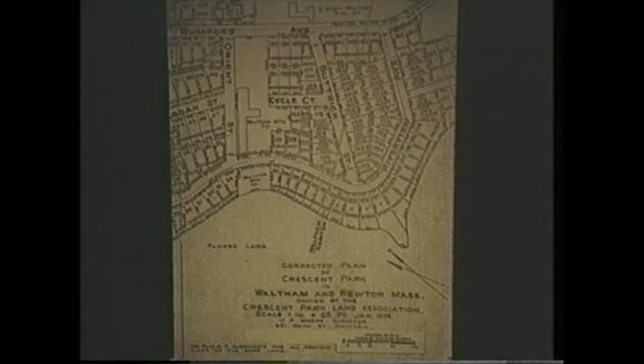He put his plant up on Rumford Avenue, as I mentioned, makers of Orient bicycles, and bought a lot of land along with the building, naming two streets after his business: Orient Street, for his bicycles, and Cycle Court. Cycle Court is still there today as a small parking lot off Buttrick Street, but Orient Street was absorbed as the Waltham Manufacturing Company expanded over the years.

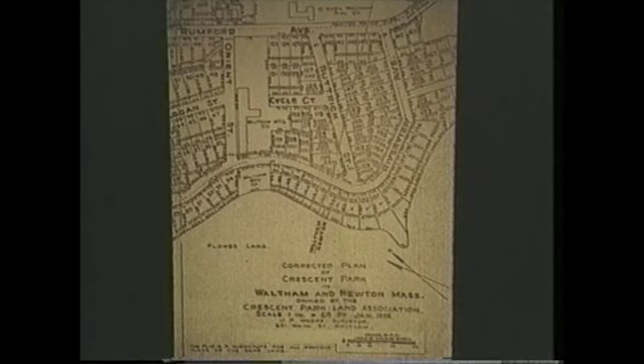Here's the fork in the front of the Orient bicycle. It was one of the 22 design patents that Charles Herman Metz had on bicycles. His most popular one was the left-handed, right-handed thread, still used on bicycles today for the pedals. The porcelain plate says Orient, Mile-a-Minute bicycle, and the engraving around it says Waltham Manufacturing Company, Waltham, Mass.

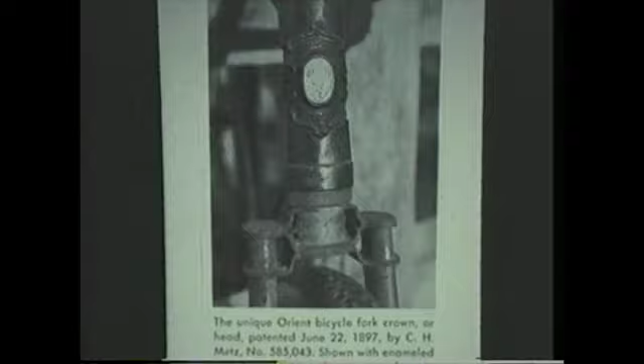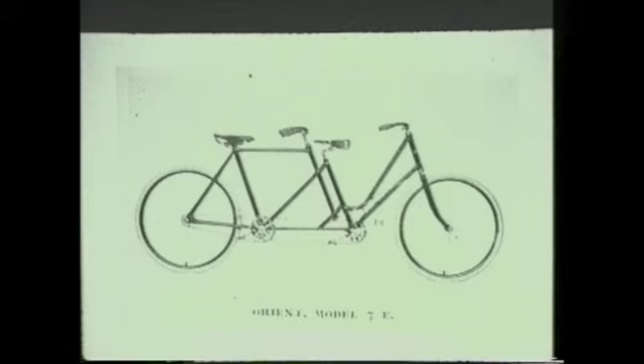Here's a bicycle built for two, obviously a man and a woman's bike. He made them for three and four. And he made them for four, five. There's a five and a six and a seven.

And he even made one for ten, a bicycle built for ten. You see right here, he called it the Oriten. He took the word Orient and changed the last three letters as a play on words, the Oriten.

It was a very popular bicycle, used in all the fairs, races, and other events. Of course, it was the largest bicycle in the world, and it held the record as the largest bicycle until 1966. The bicycle weighed 350 pounds, and with 10 men on board, they would carry a total of 2,000 pounds, or one ton, on two wheels.

It was quite an engineering feat. The bicycle is now located in the Ford Museum in Dearborn, Michigan. He made this around 1898, when the company was really doing good.

In 1894 they made 1,500 bicycles. In 1895 he went up to 7,000 bicycles a year. In 1896 he went up to 50,000. In 1897, 100,000 bicycles were built by the Waltham Manufacturing Company. They were doing real well.

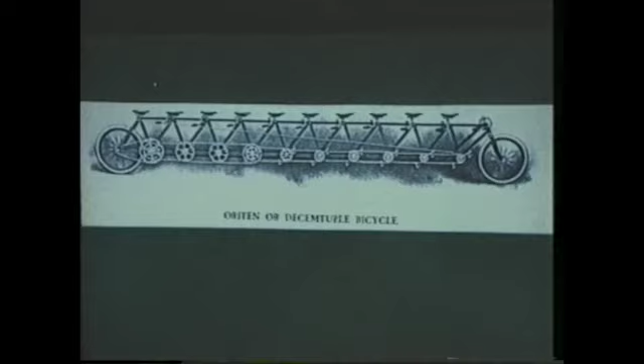This is what the bicycle, the 10-seater, looks like without anyone on it. And if you go to the Ford Museum in Michigan, this is what it looks like. Still another view of the 10-seater bike, the Oriten.

Now, one time they had 10 girls take the bicycle on a tour of Europe as part of a show business act, and they rode it around for the kings and queens of Europe. The only thing wrong with the bicycle, according to some of the men I talked to, is we had trolley tracks in Waltham, and when the wheels got caught in the trolley tracks, the 10 men would tumble onto the road.

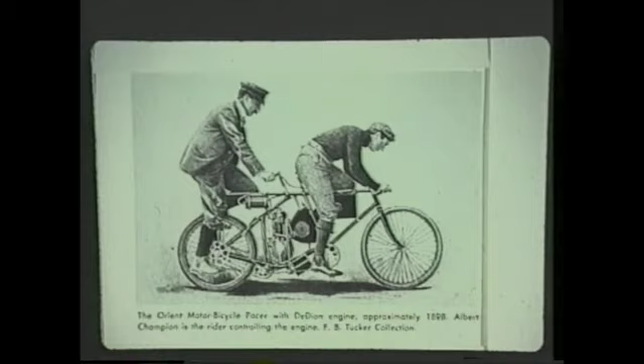Now, these multi-seated bicycles first had a practical use. They were used as pacers during the race. The race was the big thing, to make those single-seated bikes go as fast as possible, and the multi-seaters would break the wind. These pacers would go ahead of the single-seated bikes, breaking the wind so the single-seaters could go faster.

But along around 1898, Charles Metz decided to put a motor on a bicycle to act as a pacer, and he called it the Orient Motor Bicycle Pacer. The pacer itself became an instrument for conducting races, and they started to race motor bicycles, which in effect was a motorcycle. He is one of several people in the United States to claim to have invented the motorcycle.

Now, as these races got more and more acceptable to people throughout the United States and more competitive, he went over to France and hired a great French racer named Albert Champion, as you see here in the picture, the man on the left. Albert Champion raced his bicycles, motorcycles, and three-wheel motorized vehicles.

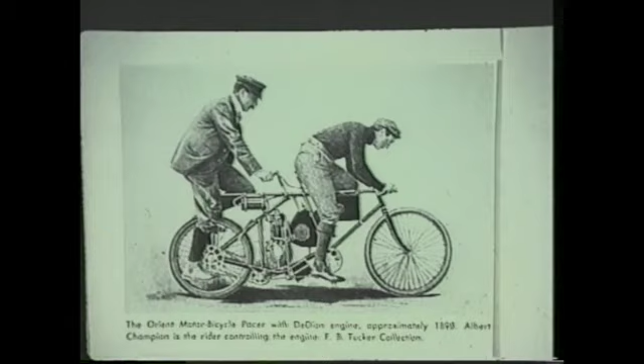He worked for the Waltham Manufacturing Company, traveling around the country racing in the name of the Waltham Manufacturing Company and the Orient bicycles. Later on in life, Albert Champion would go on to invent the Champion spark plug, which we all can see today on the shelves in automotive stores. The Champion spark plugs, invented by Albert Champion, one-time racer for the Waltham Manufacturing Company.

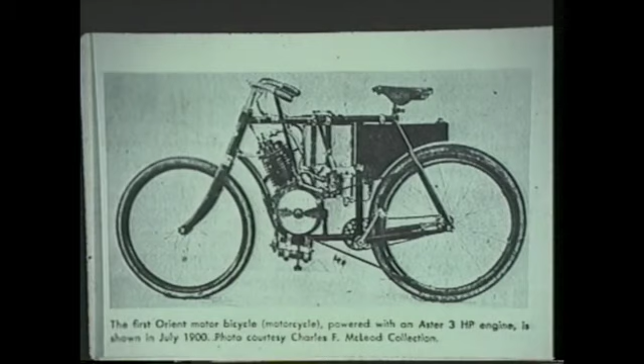Now they're starting to put these motor bicycles into production along with their bicycles. Here's one of the first Orient motor bicycles with an Aster 3 horsepower engine, July 1900. Here's a photograph of pretty much the same bicycle. You might notice the word Orient on the crankcase of the engine.

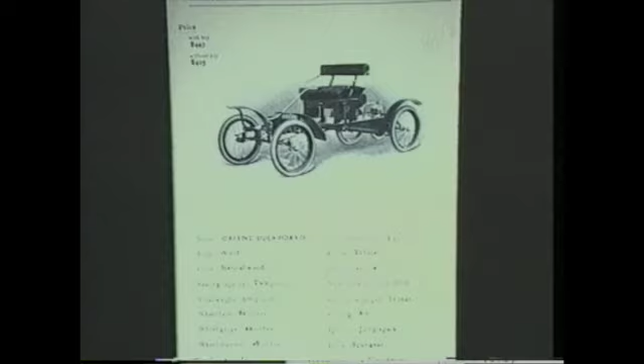Meanwhile, back in Waltham, John Robbins is still there as the superintendent, and they have a new president, Leonard Gaylord. But they come out with a second motorized vehicle called the Orient Buckboard. It was a horse-drawn vehicle, a buckboard, and they attached the famous Orient name in front of it. They, in effect, had another horseless carriage.

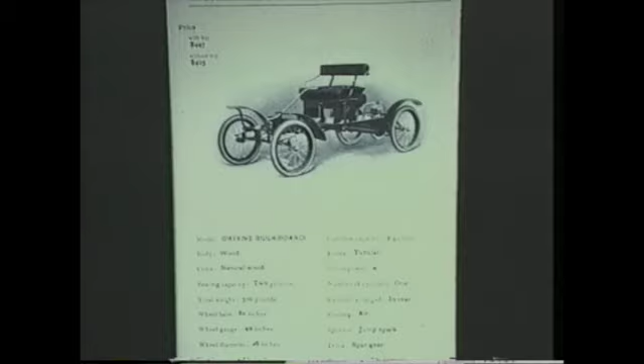The engine, the 4 horsepower engine, is located between the rear wheels. It was a very fine and successful vehicle. However, it didn't have reverse, and for the operator to turn it around, he would have to get out of the car, pick up the front, and swing it around. One of these Orient buckboards, 1903, is on display in the Waltham Museum.

Now they were producing 2 cars. The old Orient Runabout, which we talked about earlier, is called the Orient Motor Car, selling for $950, and the Orient Buckboard is the second vehicle, selling for $500. This is 1903, along with their motorcycles and bicycles.

But right along this time, they're starting to drop their line of bicycles and concentrate on automobiles. And they'll be dropping their motorcycles also along 1903, 1904.

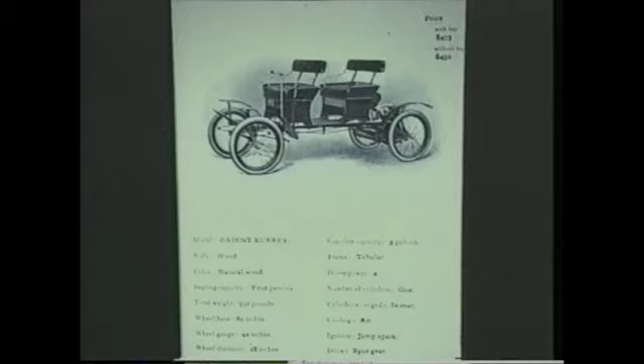And they were concentrating on automobiles such as this, the Orient Surrey, the 4-wheel vehicle, similar to the Surrey used in horse-drawn carriages. Sold for $450 without the top and $475 with the top.

They made the touring car, the touring runabout. Now here they're trying to get more horsepower. As you notice, there's 16 horsepower there. They've combined the 4 horsepower single-cylinder engine with 3 others to make a 4-cylinder 16 horsepower.

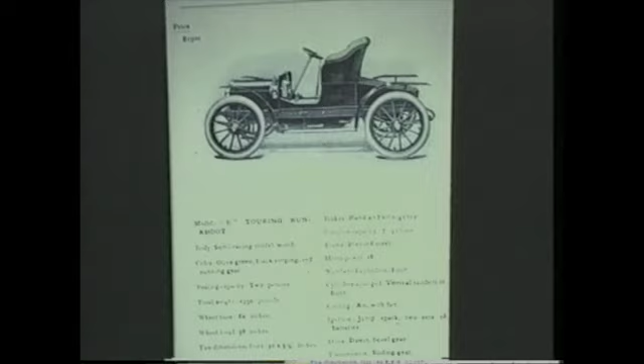This is going to prove to be a mistake because they're still relying on air cooling for these larger horsepower engines, where they should be going to water-cooled engines. It was all right for 1 or 2 cylinders, but not for the multi-cylinders that they would put on these other cars, such as the Orient Limousine.

Likewise with the Orient Light Touring Car and the Deluxe Touring Car, made in Waltham around 1906 and 7. Sold for $2,250.

This particular one you can see down at Heritage Plantation Museum in Sandwich, Mass. It's really exactly like the 1903 one, except they added a running board and a hood-covered box in the front to make it look like there was an engine there. Actually, that red box is just an empty compartment to put luggage in. So if you're down at the Heritage Plantation Museum, you'll see the last of their Orient buckboards.

They sold about 500 of these each year for the past 5 years, and it was the only vehicle that was making money for the Waltham Manufacturing Company. All the others were losing money, mainly because they were air-cooled.

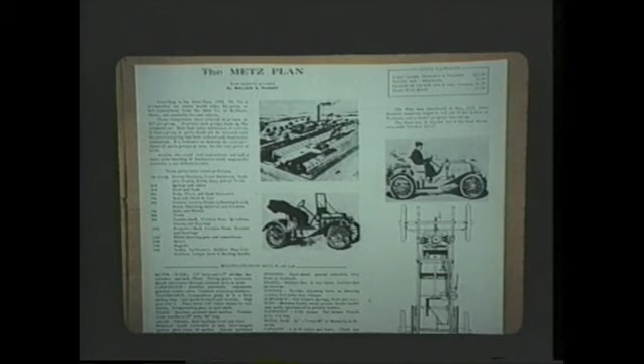This is the 1909 two-cylinder, 10 horsepower Metz plan car, as appearing in their first sales literature. This is what their plan car looked like.

To those mechanics out there, this is what the chassis looked like. A two-cylinder air-cooled engine which drove a friction drive transmission to two chain-driven wheels for power to the car at that time. A friction drive was an unusual method of transportation. Most cars at that time had standard gears. Only the Carter car, the Sears Roebuck car, and the Metz car had a friction drive. We'll be talking more about the friction drive Metz cars as we go along.

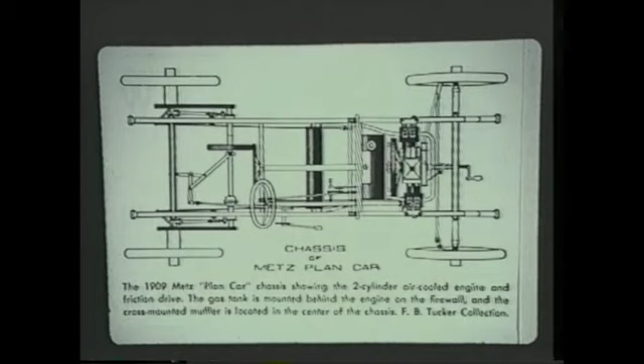Once again, in 1910, they continued their plan car policy, which kept money coming in, and they kept on hiring new employees and getting ready to produce factory-made automobiles.

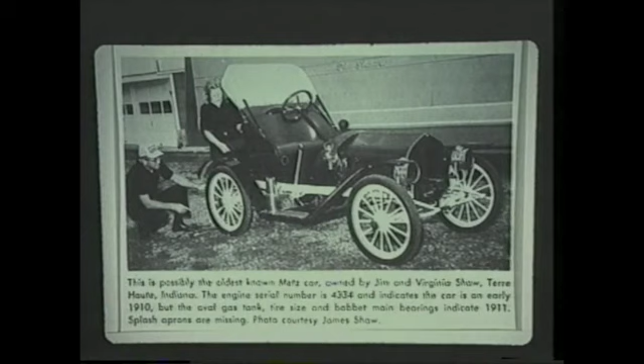Now, there are collectors of antique automobiles throughout the United States, and here we see Terry in Terre Haute, Indiana, Jim and Virginia Shaw, who own this 1910 Metz plan car. At that time we thought it was one of the oldest Metz cars in the United States, but we've since learned that there were other older plan cars.

And this is what the Metz cars look like, or any antique car looks like, when the collectors find them in the back barns of Oklahoma or in foreign countries, Australia, wherever they went, and they try to restore them to their original condition.

In 1911, the Metz company stops the plan car policy and starts assembling all the cars in the factory, as you can see here.

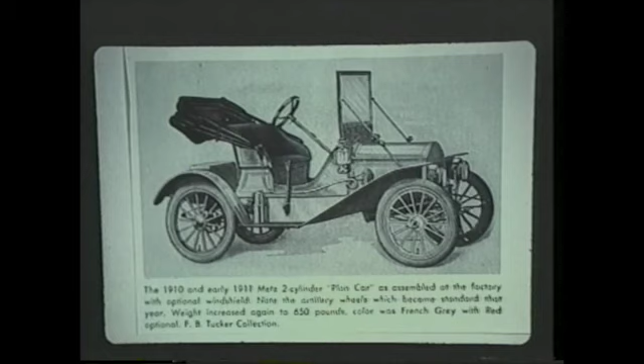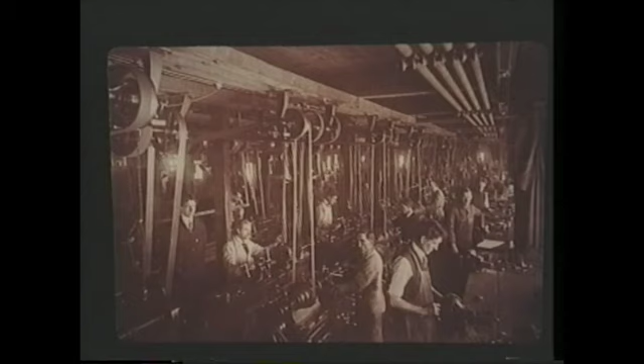Now, over on the left you can see August Hensey. He was foreman of the tool room of the Metz company. We know all these names of all these employees, but we won't spend the time with them right now. It's still August Hensey on the right.

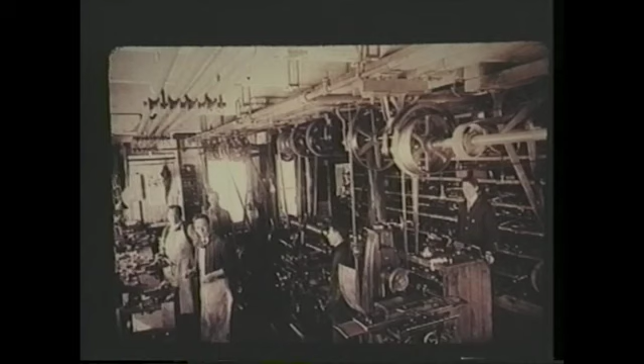To give you an idea of what the factory looked like - this particular case is the tool room. August Hensey.

They started to diversify a little bit by putting a barrel to the rear and using it as a special delivery car. It could carry 500 pounds.

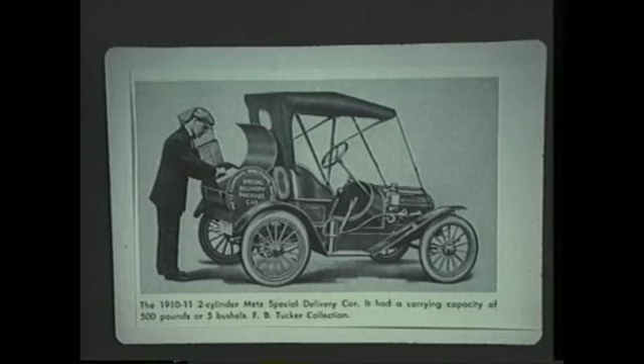Things are going so well for the Metz company that they buy the Governor Gore estate. It's not the Governor Gore estate at that time, it's owned by private individuals. It will later become the Governor Gore Museum. He puts white stucco on it and uses the building as his home and office. He also uses the field outside for an airplane field, and part of one room for the Metz Aerodrome Clubhouse, because he's thinking of getting into the airplane business.

Henry Ford was similar to this - Henry Ford tried to get into the airplane business, but was unsuccessful, and Metz would also prove unsuccessful as far as the airplane business was concerned. But he did put out a brochure and made some Metz air cars, as he called them, similar to the Blériot airplane made by Louis Blériot of France. And he promoted one of the first airplane meets in the United States on the Governor Gore estate.

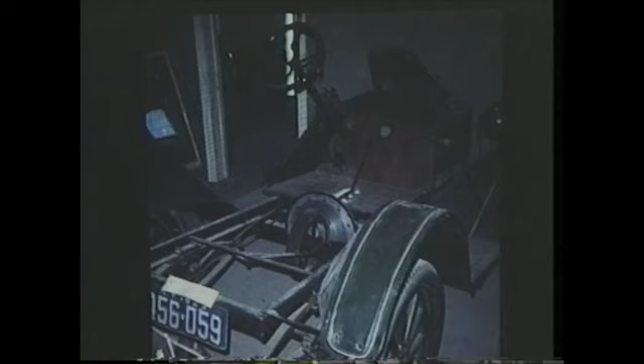So they didn't win that race in 1911. Here's a cutaway of a Metz automobile showing the friction drive. The big steel disc, as you can see, is driven by the engine. The disc in turn would drive the rubber wheel, and the rubber wheel would drive two chains for the rear wheels, and that's the mode of transportation for the Metz automobile.

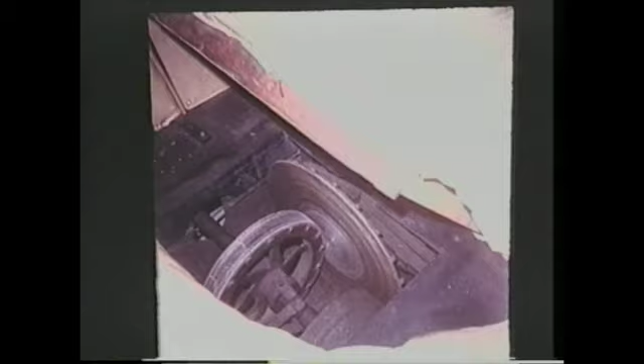A closer look at a friction drive is seen here. It's located directly below the seat. You pick up the seat and you can see the friction drive. When the rubber wheel's in the center, the car is in neutral, and when it goes one direction, the car goes ahead, and when it goes in the opposite direction, it goes in reverse. And that was the friction drive.

Now in 1912, Metz comes out with a 22 horsepower automobile, a 4-cylinder water-cooled engine driving this automobile. He learned from the bad experience of the old Waltham Manufacturing Company that when you go to 4 cylinders you can't cool it with air. It was another successful move by the Metz company, builders of this beautiful Metz 22, 1912 automobile, Waltham, Mass.

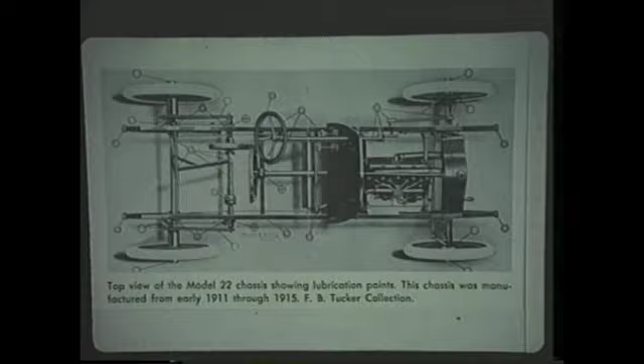And once again, for you mechanics out there, this is what the chassis looked like. And this is the 4-cylinder water-cooled engine. It's very similar to the Ford 4-cylinder engine, used on the 1912 Model 22 Metz automobile.

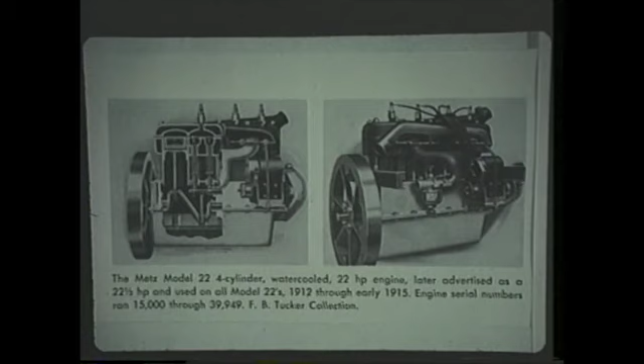Now things continue to go very well for the Metz company. And on their brochures, they show this Metz automobile, the new one, the Model 22, in front of its Rumford Avenue plant.

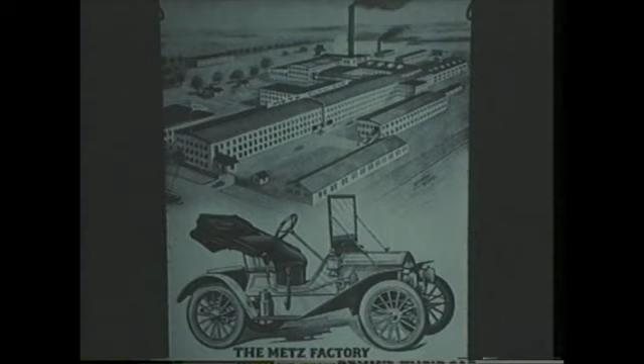Another 4-cylinder Metz Roadster. You might notice a seat in the rear. They didn't call it a rumble seat at that time. They called it the mother-in-law seat.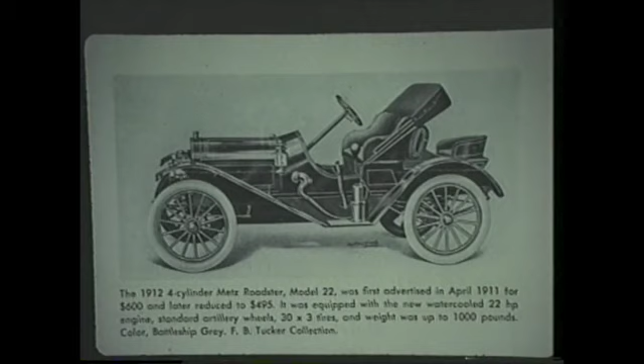Here's an owner of a 1912 Model 22 Roadster. Lives in New York, Paul Hines of Charmont, New York. Here's a 1913. They continue the same model in 1913.

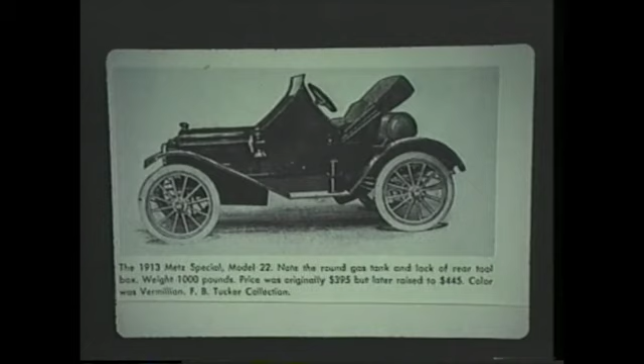But they were very happy. Everything was going very well for the Metz Company. They had a wonderful plant on Rumford Avenue.

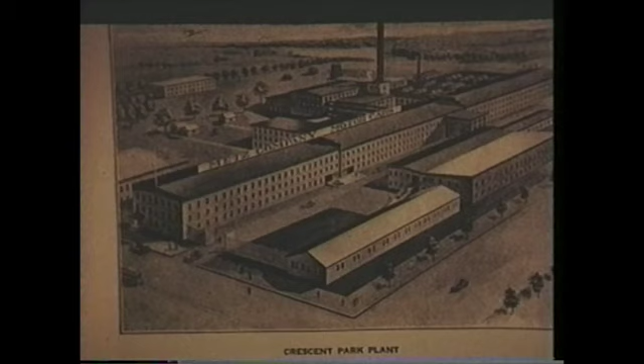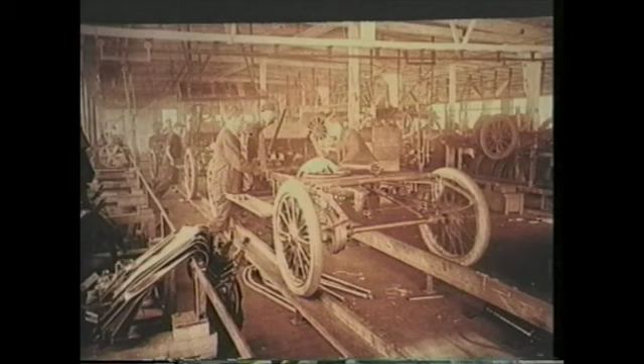It's a view of the workers that worked in the Metz plant. Here's a view of this assembly line. They put the cars together.

The leader of the Metz draftsmen was George Jessup, who would later join with Francis Davis to invent power steering in the United States.

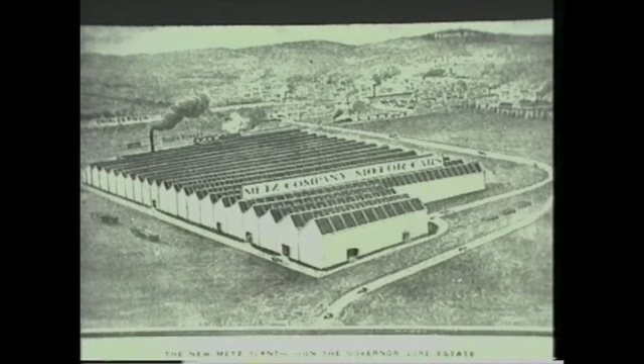There's a drawing of the new Metz plant. With the success they were undergoing, they put up another building, a sawtooth building, off between Gore and River Street in Waltham. The building is now occupied by the Raytheon Company, known as the Lever Building, but it was the Metz Company who put it up in 1914. He put it up on the old airplane field, because he gave up on building the Metz air car and concentrated on automobiles.

I'll show several pictures of this sawtooth building between River Street and Gore Street on Seyon Street today. This is on a postcard.

It acted as the auto body shop. The chassis would be made over at Rumford Avenue, then driven through the streets of Waltham one mile to the auto body shop at the Sawtooth Building, where the bodies would be put on. Then they would be shipped out by train from this location.

There you see the Sawtooth Building again, and the train taking the automobiles to customers throughout the United States. Notice the Governor Gore estate in the background, which was his home and office, as I mentioned before. He also owned a building on the corner of River Street and Seyon Street, which was his upholstery and top shop. That building is still standing.

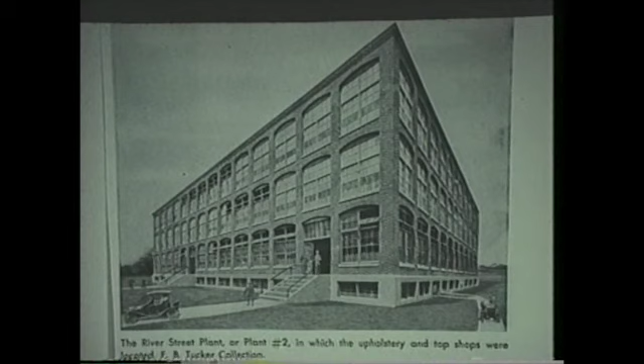He made over 7,000 cars in Waltham. He was the greatest producer of automobiles east of Detroit. He was sitting on top of the world. He had all these plants in Waltham, anticipating years of production.